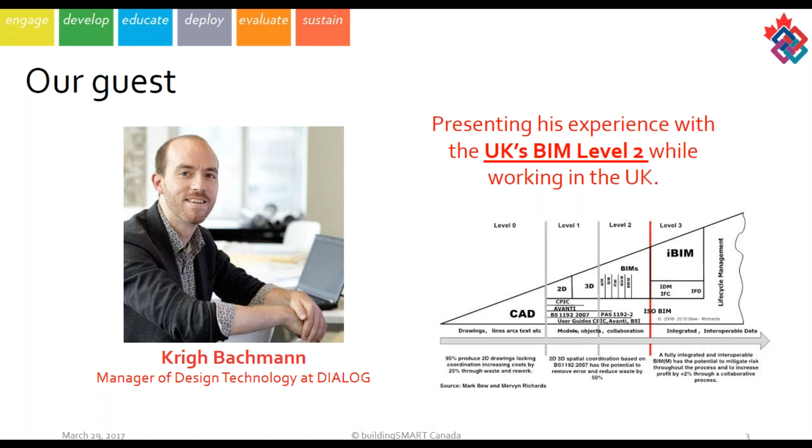Our guest today is Krigh Bachmann. He's Manager of Design Technology at DIALOG here in Canada. He spent a number of years in the UK, working under the UK's BIM Level 2 initiative, and he's going to present some of his experience and understanding of the UK's BIM Level 2 from that experience. We're very pleased to have Krigh here today with us.

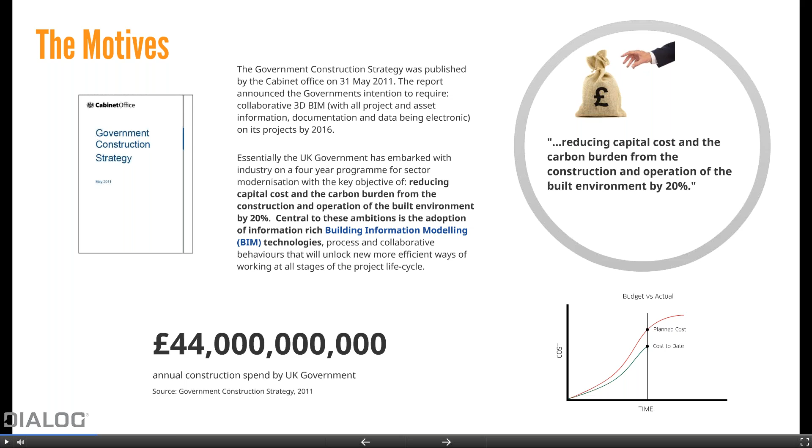And you eventually got to the point where it started to build towards a strategy that was reinforcing that we needed to invest in BIM. As part of that, the biggest milestone for the UK government was the government construction strategy in 2011, in which it actually specifically had a point that the UK government believed they could reduce costs on projects by 20% by employing information-rich building information technologies.

So they basically identified that BIM was one of the key things in actually reducing capital cost and carbon on their projects. Now, a lot of people jump at this and go, 'oh, money saving.' But when you actually get into it, the important thing to understand is that when they say it's a reduction of capital cost, they're talking about not 20% of extra money that we're going to have on a project.

But more that we're not going to have these projects that, as you've seen, so many projects in the past go over time and therefore overspending, and there's all these complications that weren't anticipated. Basically, a $100 million project will now cost 120. They think, why can't we get that $100 million project for $100 million? So with that in mind, it's the idea of trying to anticipate what the planned cost is and actually come in under it.

So this was kind of the big driver behind it. And why did the UK government step in? Because they spent 44 billion pounds, approximately - you're almost doubling that for Canadian dollars. That's a lot of money, and it's also a quarter of the construction cost in the UK. So this was something where they said, if we can reduce this by 20%, that's a huge saving.

So with all that in mind, that's why they came up with a construction strategy. Now, that construction strategy was built as a few different pieces and a few different major players coming together over a few years. And what they identified out of that was that they needed to develop a proper strategy. How are we going to implement this?

Within the UK, from my experience, a lot of people hear all this stuff and go, wow, they must be so advanced. They're actually not as ahead when it comes to things like the implementation of using Revit and the other BIM products. They actually were looking at the US and Canada and saying, well, they're ahead in Revit adoption, but we think we've got a better idea when it comes to how this all works out strategy-wise.

So what they set about doing was creating a task group, and it was funded by the government. It was formed of industry professionals working with government groups, so it helped supported the public sectors.

And the mandate that they actually had was a minimum collaboration of BIM Level 2 by April 2016, but on only government projects. There's a lot of confusion about that. It's government-funded, central government-funded projects - Ministry of Justice, Department of Defense, that kind of thing. Any of their big, large projects basically had to be BIM by 2016.

I'll talk about it, or I'll definitely try to throw in there - I'll mention later on what the actual requirement was as of April 2016 when we start to explain a bit more of the pieces behind it.

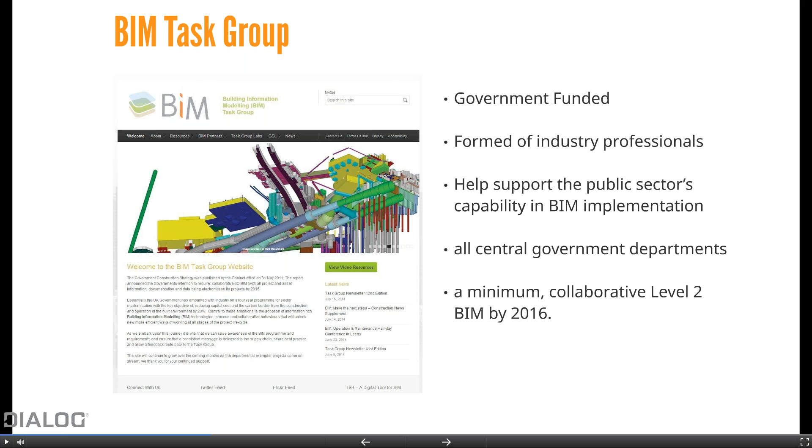So, as I said, they jumped in. They were kind of, from my experience, playing catch up, but they identified the need for standards. They identified the need to address client requirements. They looked at it as life cycle driven, not just design.

A lot of the stuff, from my experience of looking at what was happening in North America - and this is more my opinion - but from what I saw looking back across the ocean, a lot of the stuff that was developed here felt like it started within architecture and engineering, and it grew from that into construction, but it didn't seem to quite capture that holistic approach. I think within the UK, they had the advantage that they were almost starting with a clean slate, so they sort of said, okay, what are the pieces that we need to put in place? And how do we address that?

And then inevitably, everyone always sort of says, well, why BIM Level 2? I've talked to so many people that if you go to BIM conferences in the UK, they have BIM bingo, just of the things that you'll see over and over again. And the wedge is probably one of the most overused graphics, but it helps explain what the strategy was about.

Which is that they said, well, where are we starting at? We're starting out with CAD - CAD, it's lines, it's drawings. If you said, well, how do you move into something a little bit more 2D, a little bit more 3D, a bit of a mix, you're trying to look at the efficiencies that you can possibly gain with that. And it started to develop into what they defined as Level 1.

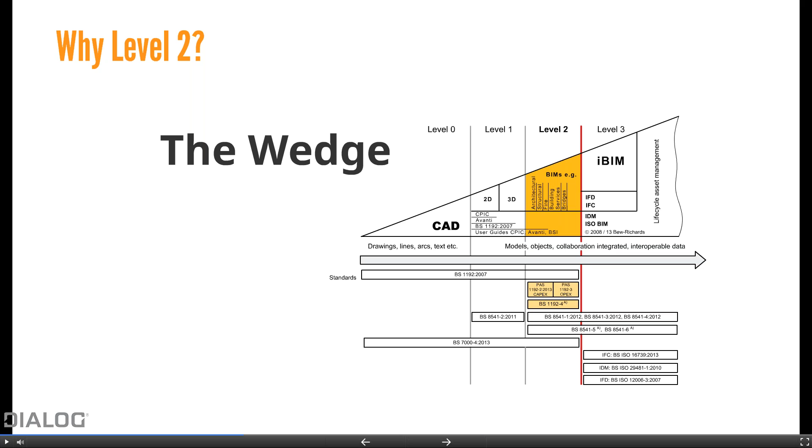As part of that, they took the step and said, well, we need standards. I'll get into what these different pieces are, but these were the foundation blocks they needed to build on. They knew the problem within the industry right now is that everybody's doing things differently and talking about things a different way. So how do you get it so that people understand exactly what they're talking about?

Within the UK, I should say they have a big emphasis on standards. From what I understand, you can actually look up the British Standard on how to make a cup of tea. They like to document and put together these specifications for things.

So it's great, but then there's this application of what it's about. What I'm going to try to capture as we get into them a bit more is what's the concept behind them? What's the actual purpose of it? Because if you read a lot of these, they're very technical and hard to read. But if you understand the concept of what they're trying to achieve, then suddenly you can go and talk to people about it, and it makes a heck of a lot more sense.

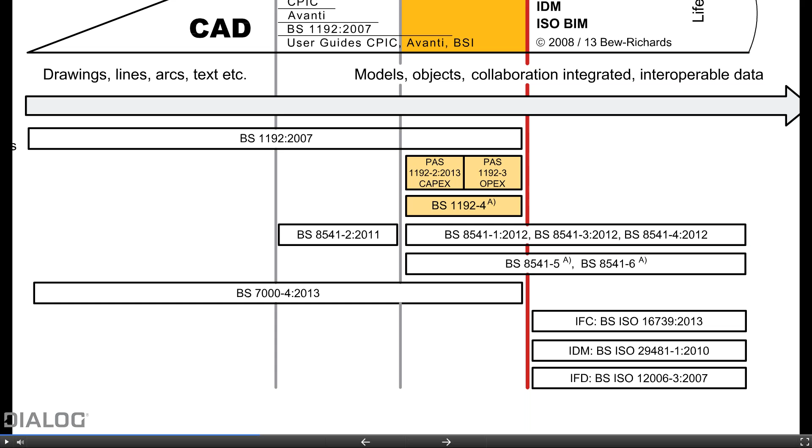So upon these foundations and these standards, they started to devise how this would evolve. They drew a line in the sand and said, let's try to get to level 2 for April 2016. Beyond that, there is a strategy for level 3. If you start searching the web for level 3 BIM, you will find the strategy involved in what they're thinking.

It's much more of a bigger picture kind of thinking about a bigger evolution, which they call iBIM. It's this much more fully integrated system, and it's looking at a much bigger evolution.

But what was funny within the UK, just to give you an idea, is everyone sort of said, well, are you working on a level 1 project, a level 2 project? Oh no, we're working on level 3. Actually, within our practice, we're doing level 4. And everyone was kind of like... when I actually took the course, it was really funny to hear the guys that drew this diagram going, how can anyone be working on a level 3 project when we haven't even finished defining the specification for level 2?

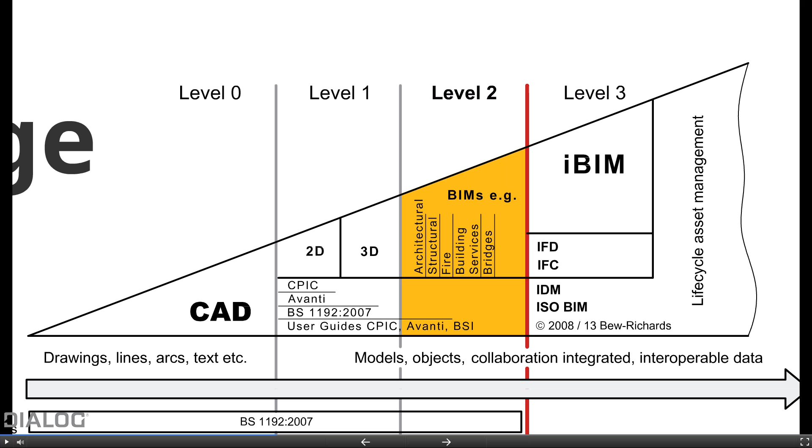So within the industry, it kind of started becoming a bit of a BIM wash. So be aware that if you look out on the web for level 3 projects and level 4 projects, they don't actually exist because the standard doesn't actually exist yet.

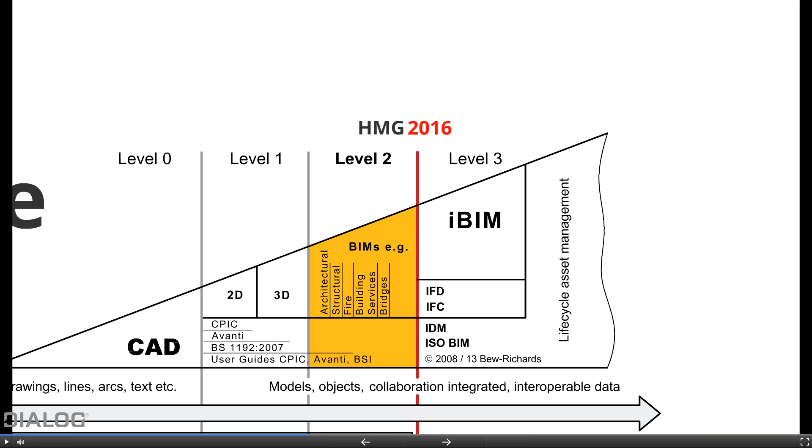So with that, they had this bigger piece. The government made that line in the sand. They said this is where they want to get to. But with the idea that the future is coming, it's that idea that we know we're trying to get to this almighty futuristic world where everything's integrated and it's magical, but at the same time we have a direction. We're not quite there yet.

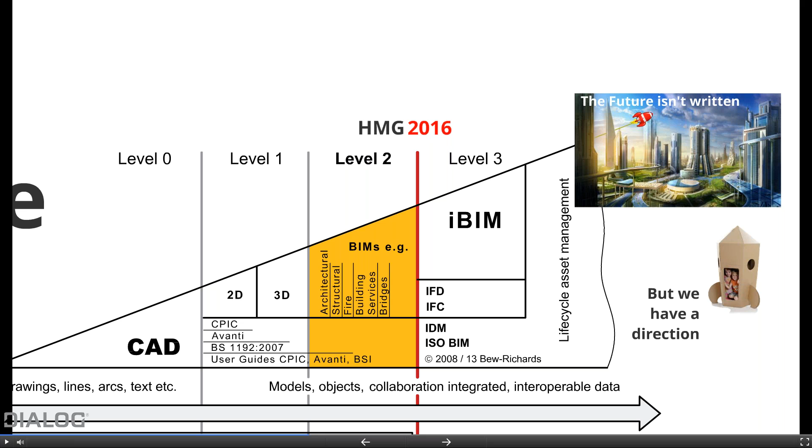So the BIM level 3 and level 4s and stuff, that's all kind of coming. But for now, it was trying to achieve that first level. So that gives you an idea of level 2.

The other thing is what the actual standard was - they identified the need for standards. Whereas you'll hear about things within the industry like ISO 9001, a well-established ISO standard I've used within architectural practices, why is this not an ISO standard? Well, they explained that an ISO takes about 4 years to produce.

A British standard takes less time. But what they actually identified is that British standards have usually been tested and are proven. So what they came out with was a PAS, or publicly available specification, and it takes about 6 months to produce, but it hasn't been proven. So this was actually being beta tested essentially within the industry.

So it was developed, they put it out there and said, okay, here you guys go, run with it. And so when you see PAS and you're wondering the difference between a PAS and a BS, it's publicly available specification versus a British standard.

So with that in mind, they are developed by recognized standards organizations within the UK. And the stuff that's right now as a PAS is actually being looked at to be either adopted as a British standard or developed into a full ISO for international use.

So the question inevitably, before we get into the details, and you'll see a bit more with the details, is how do they compare?

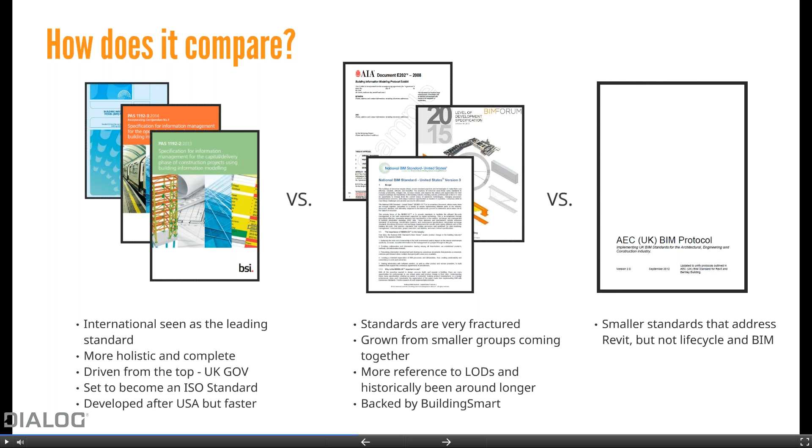The other thing I should say about the standards organizations backing this is it basically started shaping and changing a lot of different groups. There's things like within the UK, just to give you an example of what I was used to dealing with, RIBA, the Royal Institute of British Architects.

RIBA actually changed how they used to refer to their stages of delivery for a project, from A, B, C, D to 1, 2, 3, and completely shifted what was in each phase, because they understood you couldn't think about it the same way we think about concept design and construction documents. They love their standards, so they break it down into specific stages where you could go in and document exactly what fell into each. They developed this because they realized there were things about BIM that were changing it and different things happening within the industry.

The fact that a tendering of a project could happen at different phases, broken down at different points, actually shaped the way they created stuff. They created these different pieces with BIM overlays, and this impacted architecture, engineering, and the surveyors group. Everybody was getting on board with it, and I thought that was really interesting to see within the industry, how fast that came together.

So a lot of people say, okay, what is BIM Level 2? From what I understand, it is being developed into an ISO standard, or at least pieces of it are. This presentation does have a link at the end so you can come back and visit it. If you're jotting down all this stuff really quickly, I did provide a link so you guys can go through and view it on your own.

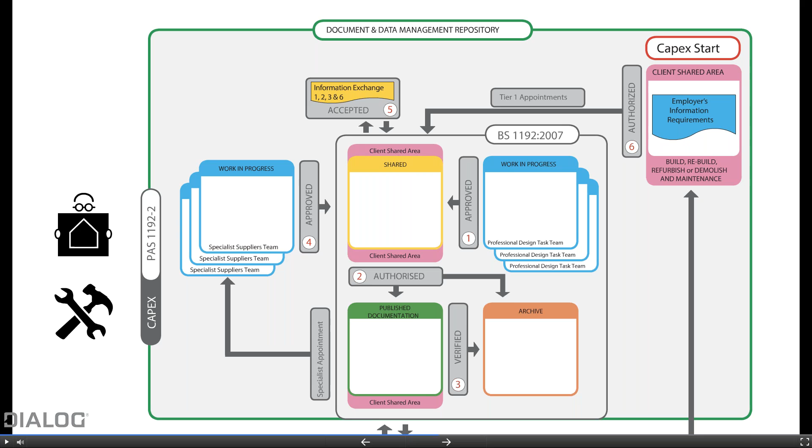These drawings are issued for construction. They have reviewed them, they have authorized them, but it is up to the teams to approve them within the shared environment, and to maintain that you could always go and find the latest shared model or the latest published model. The other thing is it also started to shape how we actually created our models and what we named them. That also got carried through into PAS 1192 Part 3, which I'll mention in a second, which started to look at the operation side of things.

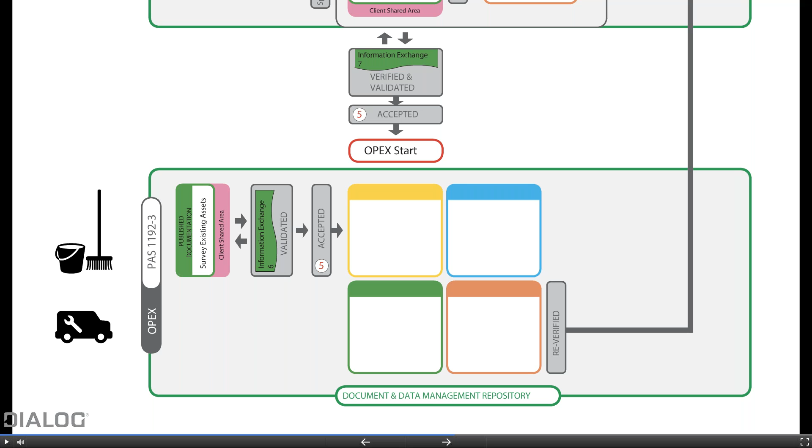So basically, if you can imagine that same workflow of information being done within a team that's actually doing the operations or facilities management, or if they do some renovation, that still has to happen before the information can be used, before people understand what status the information was at. So that was something they captured as the bigger life cycle of it.

And so they came out with this diagram, an expanded version of the one you'll find in BIM Level 2 under PAS 1192 Part 2. I know it's a little hard to read here, so I'm going to dive into it a bit.

The idea is we had these projects that were BIM, and we could do BIM at the design and construction phase. But if you worked back, what was really interesting for the industry, and what I think was the bigger piece about all this, was that they said this isn't about how you design, the concept, or which version of Revit you're using. I know I refer to Revit a lot, but that's just because I've used it on so many projects. What I'm saying is, it's not just about the technology.

It's about what's the life cycle of this. And what they actually did was start right at the beginning of the process, and said, okay, the CapEx, the capital expenditure, the project's going to start with your employer's information requirements.

So we used to go to our clients and ask, what's your requirements for the project for BIM? And they'd say, I don't know, what can I get? It took me a while before I could go back to them and actually talk about EIRs, AIRs, and OIRs. And by the way, they love their acronyms in all these different standards.

But within the industry, you started to speak a common language. You could say to somebody, well, where's your EIR? And people with BIM knowledge would actually know what you're talking about. So the standards helped that out.

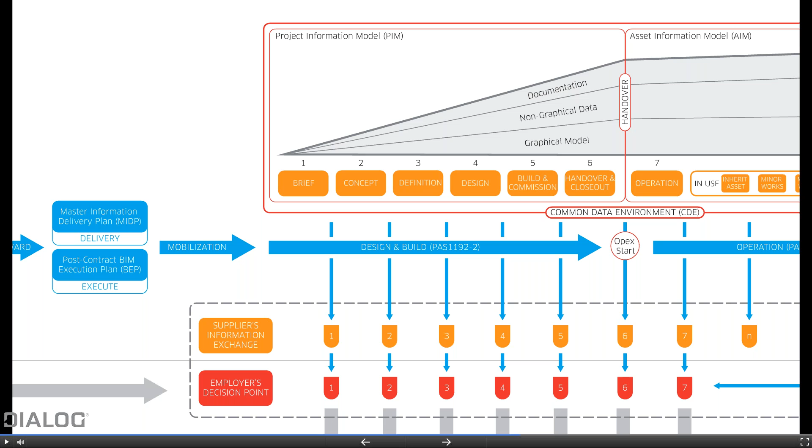The idea of this was that you also build up the information if you're doing an exchange into databases, because it allows you time to do the information exchange and put it into the system and test out whether or not it's coming through correctly. So you didn't get to this whole thing at handover where the operation started and you suddenly ended up with a massive amount of information being dropped on you and the team being overwhelmed. That's the idea of soft landings.

They also looked at, okay, so if PAS 1192 Part 2 was that section beforehand, operations then is that if you're doing major works, transfer of ownership, breakdown, maintenance, all that sort of stuff, you've got all of that happening, and they need a specification as well.

So they had an asset information model as opposed to a project information model, and that was maintained where you just made subtle changes, but things would change over time.

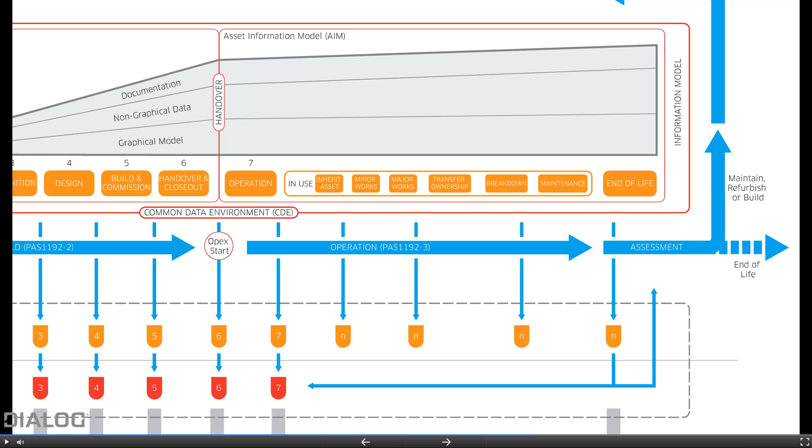And then even the fact that that all led into what happened at the end of the life of the project, when you're decommissioning. This is an expanded version of what you'll find in there, but it helped clarify a lot of what we needed to understand about the workflow of what needed to happen.

This is a diagram that I still refer back to with clients, because I think it really does explain what BIM is supposed to be about. What happens within the individual little pockets and the exchange of information between different people is all captured as part of a BIM execution plan, and that's just up to those groups to really understand.

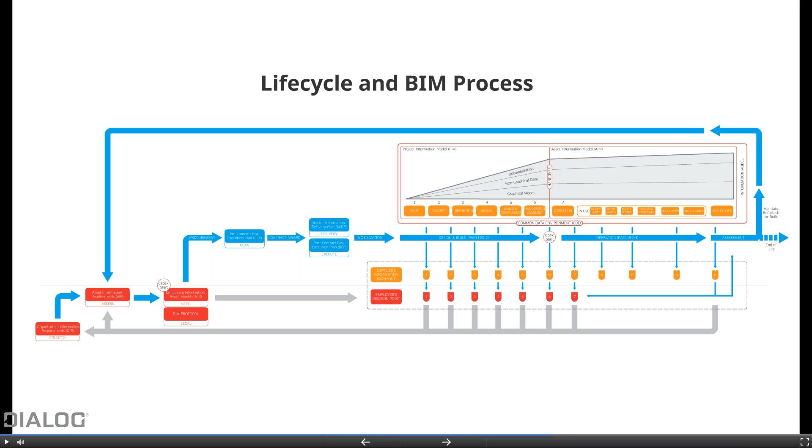Now the other piece of this is, for example, who's doing what on a project. There was a whole thing of roles on a project. I'm sure you've run into this on projects: well, who's supposed to be doing the BIM stuff? What's supposed to be coming from the client? And what do the individual teams need to do on a project? So they came up with this whole concept that they define these roles.

This is just a point form summary, so you can come back and read it later, but it's this idea that individuals could be assigned to these things, or more than one individual could be assigned to it, but these were specific roles. So when we talked to clients and they said, okay, let's set up who is going to be the actual project information manager, who is going to be responsible for collating all the information coming from all the different groups together and making sure that translates over to the client properly. That's a project role, and it was a big role on projects.

There's all these different pieces of it. You guys can come back and read this at another time, but you'll see specific things: the employer's representative is the one that accepts models in the CDE, so that was a specific role they had to have. Construction and design leads were the ones that assigned levels of definition, or LODs. There are different specific things that are important, but within task teams, it's the fact of who's managing the clash detection. So you had to identify people for these different roles.

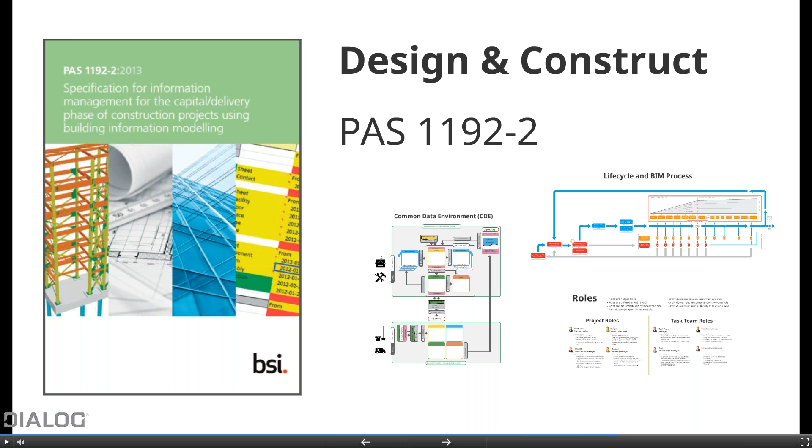And like I said, this sounds like a lot, and whether or not it actually happens on all the BIM Level 2 projects, that was the idea and the goal that they were trying to get to. So that gives you an idea of one of the specifications.

1192 Part 3 was basically the same as Part 2, but for operations and facilities management phase of asset management. So it's looking at what that workflow is when you break it down, when you're not dealing with a large architectural practice and engineering group and landscape all coming together. It was more about, okay, we just need to maintain our facility. What are we actually doing on it?

Security is one of those ones where if you're in an open collaborative environment, but you're dealing with something like the Department of Defense, how do you actually deal with that? This was one where they started to look at specifications for security.

Keeping in mind, I personally never had to deal with this specification, but the feedback from other BIM managers who did deal with it was that it was an all or nothing approach. If you had a very super secure project, yes, it applied. But if you had something that was kind of, well, we want to keep it secure, but it's not quite an embassy or a missile silo, then you're probably not dealing with it. You couldn't take bits and pieces of it. So something to keep in mind with that.

They had the development of COBie UK, which was recognizing that we'd heard about COBie, but it was recognized that they needed a way to exchange information that was a recognized standard. So the idea was to say, okay, we will adopt COBie, but of course they came up with a slightly tweaked version of it. So PAS 1192 - and I should actually say that's British Standard 1192 Part 4, not Part 5 - but you can see it was identifying the need for COBie in that regard.

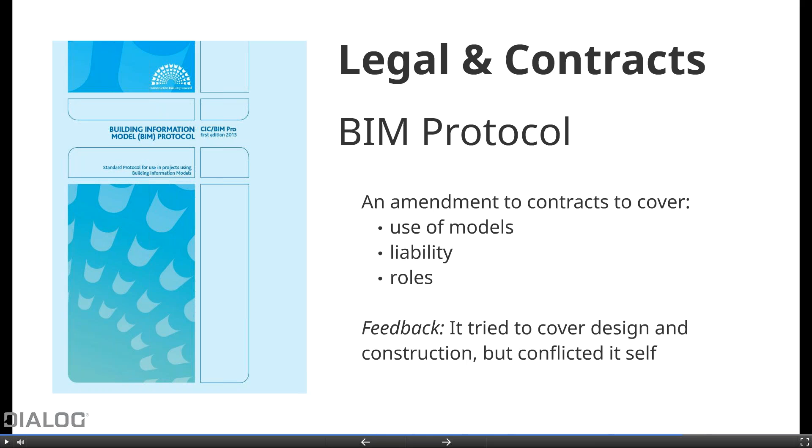The digital plan of works is something you guys actually can have access to. If you search for the NBS BIM Toolkit and the NBS National BIM Library, it's quite interesting because, if you've seen the BIM Forum LOD definitions, this was a way they were trying to build this into a website where you could go in and not only search for different things - so if you wanted to look up door sets, you could actually see what a stage 3 level of detail or level of development was for a door set.

But the other thing about it is they also developed it for level of information, because they identified that there's the level of geometry, but then there's also how much information is embedded in the model, as well as they also tried to establish this as a tool for building your BIM requirements.

The only problem with that is that they failed to capture that introductory level of things. So it kind of felt like they threw you straight into the depths of a project. A lot of clients, I think, need an ease into this when putting together their BIM requirements. So it didn't really help them develop an EIR for the project because it never really explained to them what an EIR was. But in some ways, this was kind of supposed to be that answer to it.